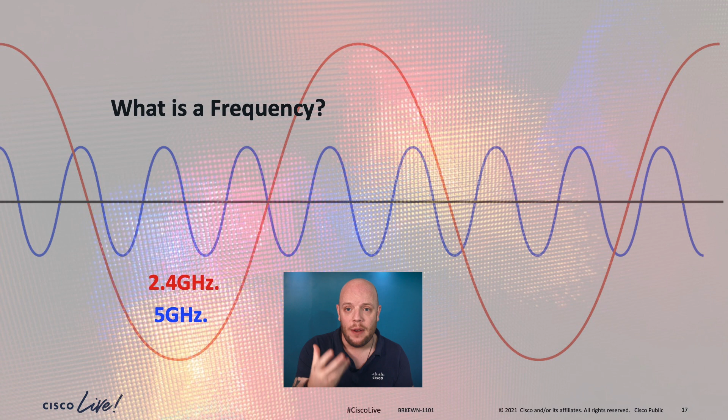What's a frequency? You heard me talk about 2.4 and 5 gigahertz, and what does that mean? A frequency and the gigahertz. Well, 2.4 gigahertz basically means there's 2.4 billion of these red radio waves happening in 1 second. That's B with a billion, ladies and gentlemen. 5 gigahertz means 5 billion of those radio waves happening in 1 second. Okay, that's quite a lot of radio waves, I know that, yes.

And social distancing is a thing. We all know by now that social distancing is important. We need to maintain that. But we as wireless engineers know that already for many years, because social distancing is exactly what we do with the channel plan. We will look into that in a minute. You basically separate out channels and keep a distance between them.

One of the questions that we get a lot is, is Wi-Fi bad for health? And the short answer to that is, well, if someone throws an access point at your head, then yes, it might hurt you. Otherwise, no. And to really dive into that question, think about this. Who in the call uses their phone as an alarm clock in the morning? I'm pretty sure that you do that as well. About 80% of the people do that. Is that bad? No, not at all. I'm doing it as well.

Now let me ask the second question. Do you put it on flight mode? No. Most people don't put it on flight mode. There's only 12% of the people that put it on flight mode. Now, let's dive into some of the numbers. Your mobile phone is transmitting on a GSM network with 1 watt, which equals 30 dBm, which equals 1000 milliwatt. Where we're looking at an access point with an RSSI to the laptop of minus 66 dBm, that equals 1/4 billionth of a watt. Okay?

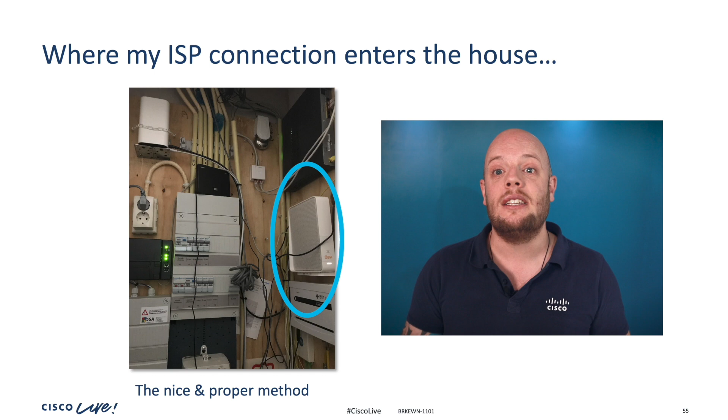Make sure your access point is close to the client. So I asked a couple of my colleagues, all the pictures you're gonna see now are Cisco colleague home environment networks. I asked them, where do you have your access point? I'm going to share with you the pictures. I got answers like where my internet service provider connection is entering my house, and doing that the nice and proper way, or the hang in there method. Okay, these are real pictures.

I have a colleague that invented wireless stacking, putting 2 access points on top of each other to have a better coverage. I have seen instances where they put the access points in a central spot in the apartment and cover the entire apartment. So these are 2 access points from one colleague, and they are 2 different vendors, 2 different networks. So this is really a no-go. Always use your equipment from the same vendor, because in that way they can work together, they can interact, and they should be also registered to the same controller environment.

In this instance, the access points actually compete. Okay, they are saying I'm important, no, I'm important. And even though you have the same SSID, so the same Wi-Fi name on top of them, yes, you can connect to both of them, but it doesn't support roaming because there are two different access points from two different vendors that handle the roaming in a different way. So that is not how to do it.

Recommendation, if you need to have two access points, which is absolutely fine, but make sure that you use them from the same vendor. Okay? And ideally access points that support multiple access points, because not all the consumer grade access points support that.

It starts at the workspace, and I fully agree on that. In your workspace environment is where you want to have the best connectivity. So, like I always say, you want to stay close to your client. So you want to have an access point close to where you are working and where you are doing your video calls and where you are participating in your meetings.

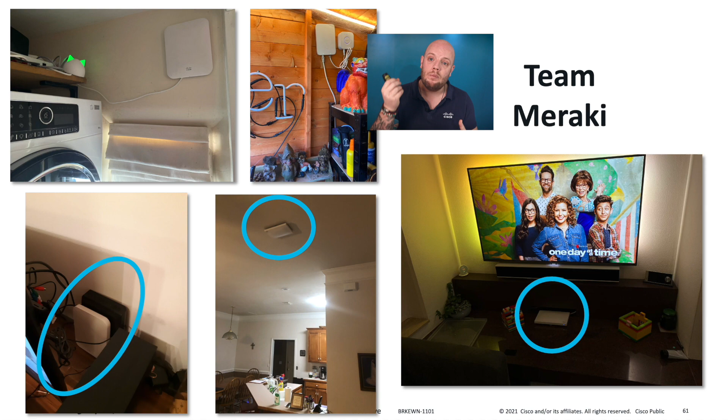So a lot of our colleagues use Aironet access points, and of course we also have a lot of colleagues that use Meraki access points. Here an example of an access point put in front of the television, which is actually the access point that covers the living room area. So as you can see, the recommendation is put your access point where the client is.

I like this picture. It says polarization matters, because polarization is the way radio waves move. So let's say my thumb is now a radio antenna. That means that my hand represents the radio wave as it moves. And access points that are ceiling mount should have the polarization with the antenna pointing down or up, because that gives us the right polarization.

If I put a ceiling mount access point on the wall, I have the wrong polarization. You see? That gives us a horizontal polarization, and that's not what we want. So installing the access point the way it should be installed is an important one. So ceiling mount should be either on the ceiling or pointed upside down, laying down, and wall mount should be installed on the wall.

We have mix and match, so colleagues that combine Meraki access points and Catalyst access points, and we have Team Linksys, because there's still a lot of our colleagues using the original Linksys equipment, which is, as you can see, still very common to be used. But when you buy a home Wi-Fi router for your enterprise, this is what you get. And when you are buying an enterprise Wi-Fi in your home network, this is what you get.

So it does matter what you're working on, and what is really most important is where do you put the access point. So I'm going to show you my home network setup. So this is the house that I bought in August, and I took my favorite tool, Ekahau, to do some designing and say, okay, where am I going to put my access point? Well, the connection comes in on the wiring closet on the ground floor. That's where the internet connection comes in.

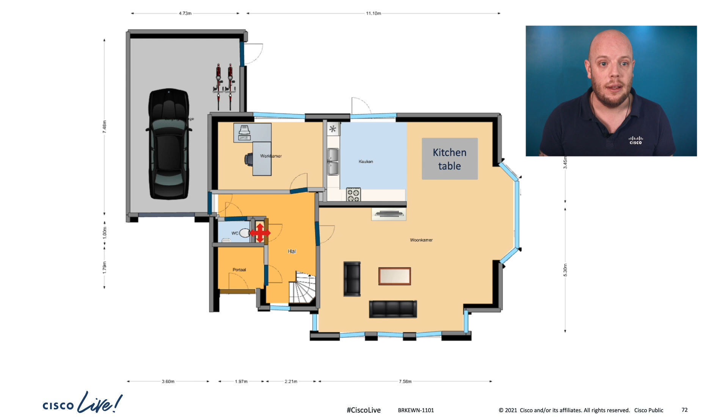And then I was figuring out what are my favorite spots to be working. So my number one favorite spot is the kitchen table. You as well, I know you do. My second favorite spot is my office. The third spot is on the couch in the living room, and the fourth spot is on the restroom. No, not you, not you. I know. Everyone else does, but not you. So these are the four spots that you really want to have good connectivity, right?

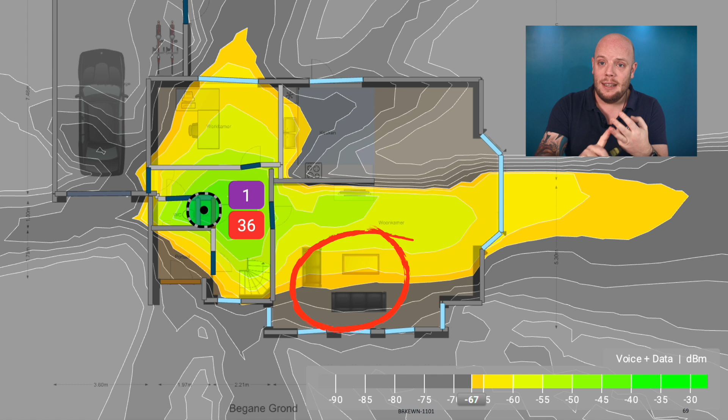So if I take my access point and put it on the spot where the internet service provider enters the house, and this is what most people do, okay? This is the connectivity that you get. And as you can see, my number one favorite spot, the kitchen table, I will have no connectivity. Spot number two, my office, I will have some connectivity, but not too good. Spot number three, the couch, I will have some connectivity, but not too good. My only spot that I have proper connectivity is the restroom. Okay, so this is not how to do it.

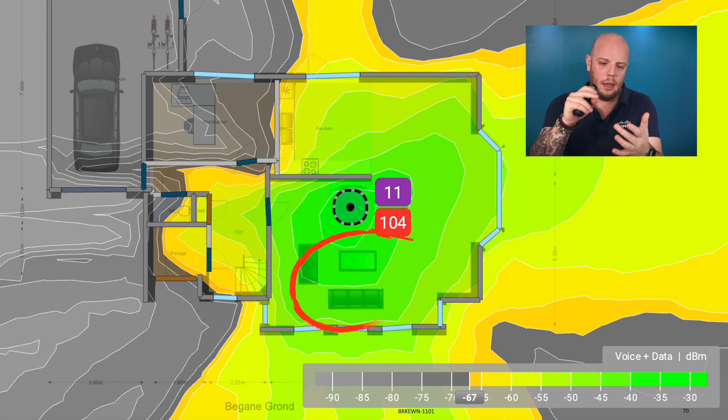So what if I move my access point now to the living room? As you can see, I have a much better connectivity now. So I will have decent connectivity on my kitchen table, in the living room, even the restroom. I have some connectivity, I just don't have connectivity in the office. So what should I do?

Take two access points, one in my office and one in the living room. And as you can see now, I have fantastic connectivity throughout my entire ground floor, including up to my garden. So this is actually how my network is set up in my home.

You might not have sophisticated tools like I have with the Ekahau, but there are a lot of tools available that you can do some decent investigation with. I already gave you speedtest.net and Speed of Me. These are two other tools that I really like.

So I like the Wi-Fi augmented reality for Android and the Airwave augmented reality for iOS, which basically gives you an opportunity to walk around through your house and then you see the RSSI that we talked about. So how strong is the signal and what would be your average data rate. These are free tools, really fun to use, and it gives you a good indication of how the performance is in your house.

Why is that so important? Well, if we're looking at Wi-Fi, and we're going to go back into the basics of Wi-Fi again, we have a transmitter and a receiver. But as you probably know, in your house you will have different materials. And what we see most common in the house is cinder block, brick wall and concrete wall. Those are the three main ones that we look at.

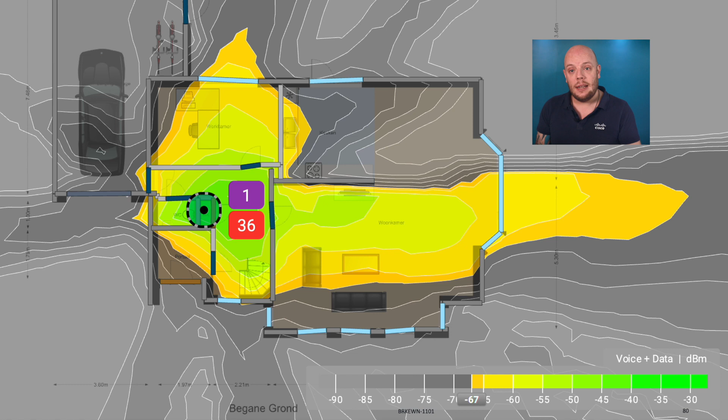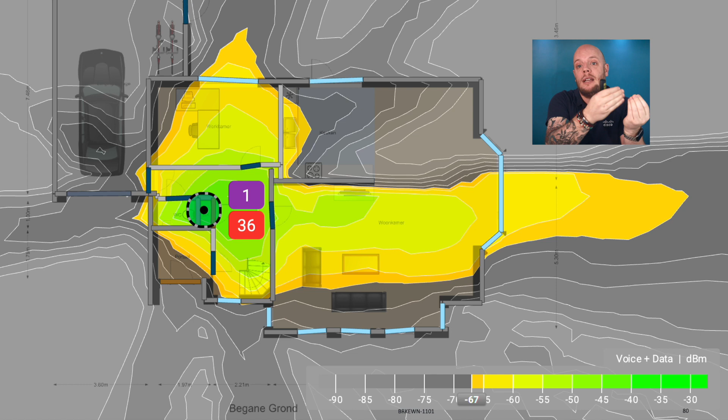So going back to my initial design where I said, okay, this is my floor plan. The internet connection comes in on the wiring closet on the ground floor. If I put my access point there, at the kitchen table I will not have proper Wi-Fi because, what you see here, the signal had to move through two walls. And that's the reason why it doesn't come there.

A complaint that I hear a lot is: my internet connection comes in on the ground floor, I put the Wi-Fi over there, and in the attic I don't have connectivity. Can I put a wireless extender? Can I put wireless repeaters? Please, let's all agree to never use wireless extenders and wireless repeaters again.

Simply buy a second access point and put it in there. They don't have to be expensive. You can buy a cheap access point, but you will have so much better connectivity. And a second access point is not the same as a wireless extender or a wireless repeater.

Okay. Best practice. Where do you put your speakers for your audio system? If you're listening to music, you have a speaker close to you, right? Because then you hear the music nice and clear. You're not going to put the speaker in a closet. You're not going to close the door. You're not going to put the speaker in another room for you to listen to the music in this room. Why? Because the sound doesn't sound good.

The same goes for your Wi-Fi. Put your Wi-Fi where the clients are, okay? So the best practices: put your access points close to the clients. If you can see your access point, you are in the best position. And the simple rule that I have here, make sure you can see your access point. If you can see the logo, you're probably good to go.